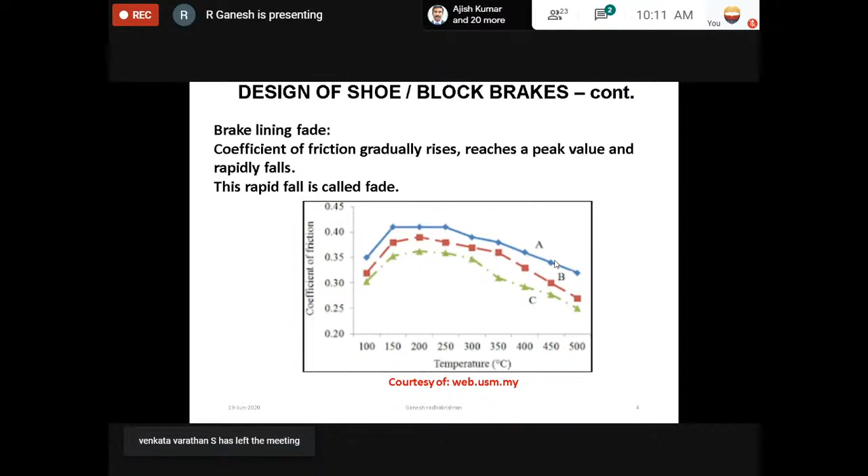Now actually coming to the topics, since the topic given is design of shoe brakes, I will be discussing three types of shoe brakes: single shoe external braking system, double shoe external braking system, and internal shoe expanding braking system. Let me give a small introduction on the single shoe external braking system.

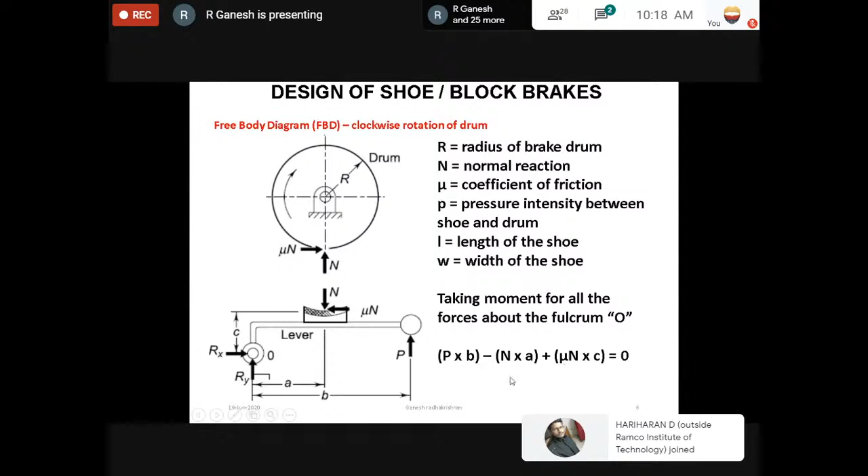If you take N into A on one side, and P into B plus mu N into C on another side, and if you satisfy this condition A greater than mu C, the frictional force helps to reduce the magnitude of actuating force. That means when this condition is satisfied, less actuating force or effort is enough to give the correct amount of braking action. That is called self-energizing braking action, one of the most desirable cases in any braking system, because if the entire braking action is done with less effort, we definitely appreciate that.

Coming to case 2 and case 3: when the condition A equal to mu C is satisfied, or A lesser than mu into C is satisfied, in the second case no actuating force is required for braking action, which is not desirable at all. Because whatever the braking system, whether for an automobile, a machine tool, or any application, control should be in our hands. So if no actuating force is required for braking action, it is not a desirable case. We should not allow it to go to self-locking conditions.

And the third one is uncontrolled braking and grabbing conditions where the actuating force is negative, which again is not a desirable case. So while designing a braking system for any application, while selecting the distances A, B, and C geometrically, and after selecting the correct brake lining materials, you should check whether this condition A greater than mu into C is satisfied or not.

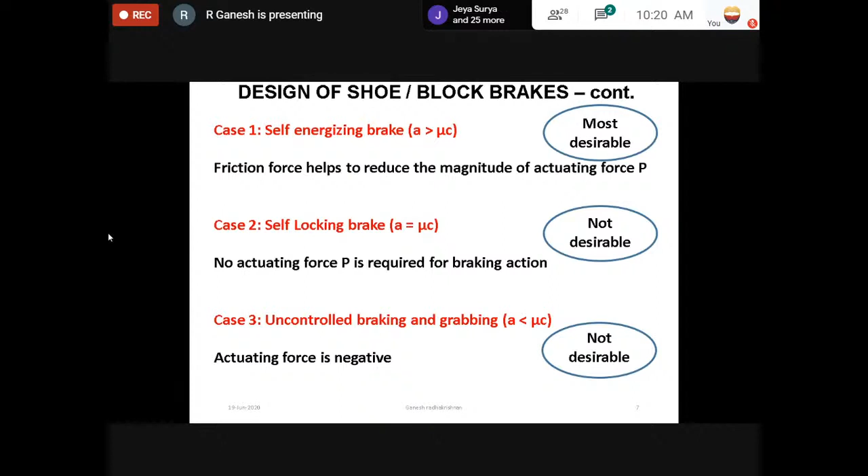Normally in the design, certain things we calculate in any braking system. The first one is the braking torque. Braking torque, of course, we all know it's the frictional force multiplied by the radius of the brake drum.

Frictional force is mu into N. Mu is the coefficient of friction, and N refers to the normal reaction. So frictional force is mu N into capital R.

The second one is the dimensions of the brake shoe. Pressure intensity equal to normal reaction divided by the cross-sectional area. So P equal to N divided by L into W. This L, the length of the shoe, can be calculated by radius of the brake drum multiplied by 2 theta. L equal to R into 2 theta, the included angle of the brake shoe.

The third item is heat generated during braking action. Heat generated equal to frictional force multiplied by the average velocity. Average velocity is the initial velocity plus final velocity divided by 2. Sometimes the final velocity can be either 0 or some velocity, because the braking action can be either to reduce the speed of the system or to stop the system. When it stops the system, the final velocity becomes 0. When it's reducing the speed, you will have some value for the final velocity. So you take average velocity and multiply by the frictional force to get how much heat is generated during braking action.

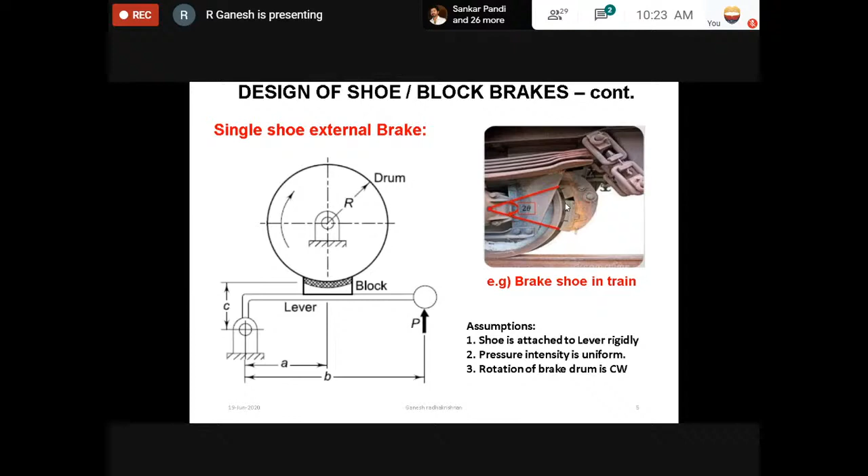Let me explain with this diagram. See here, when this 2 theta goes beyond 45 degrees, we call it a long shoe. About this midpoint, on the upper side as well as lower side, you will have more curvature. This curvature will offer some additional wedge friction, inclined friction, that will slightly increase the coefficient of friction. How much the coefficient of friction is increased can be calculated by this empirical formula: mu dash equal to mu into 4 sine theta divided by 2 theta plus sine 2 theta.

When mu is, for example, 0.2 or 0.3, when you substitute in this formula, you get mu dash, the equivalent coefficient of friction, slightly higher than the original. That means it takes care of all those inclined surfaces on either side of the midpoint, accounting for both tangential forces and normal forces of the friction force, which slightly increases the coefficient of friction. Once you calculate this equivalent coefficient of friction, the earlier condition goes invalid. The pressure is not going to concentrate on the midpoint; it is going to distribute uniformly on the entire surface.

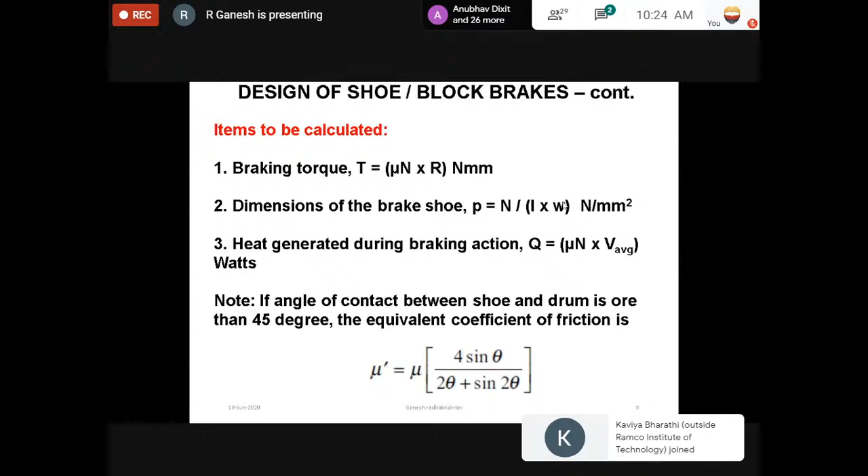Coming for the next shoe, that is a double shoe external braking system. So here you can see the same type of arrangement will be there. This is the lever, this is the brake shoe, and this is the brake drum.

Exactly in case of a single shoe external braking system, you would have seen one half of this. So you will have two halves, one on the left and another on the right. You will have two levers, two brake shoes, one on the left, one on the right. And you'll have two fulcrum points or two pivot ends. And this represents the actuating force or effort we apply for the braking action.

This diagram I have taken from one example problem, that's why it has some dimensions. But you can omit that and see the structure of the braking system alone. And this is a real-time example what I've given here. You can see two external braking shoes on either side in the train.

So in a single shoe external braking system, normally we calculate torque equal to frictional force multiplied by the radius of the brake drum. Here it's a double shoe braking system, so we'll have two reaction forces and two frictional forces, on the left as well as on the right shoe. So here the torque will be the summation of torque on the left and torque on the right, that is frictional force on the left and frictional force on the right.

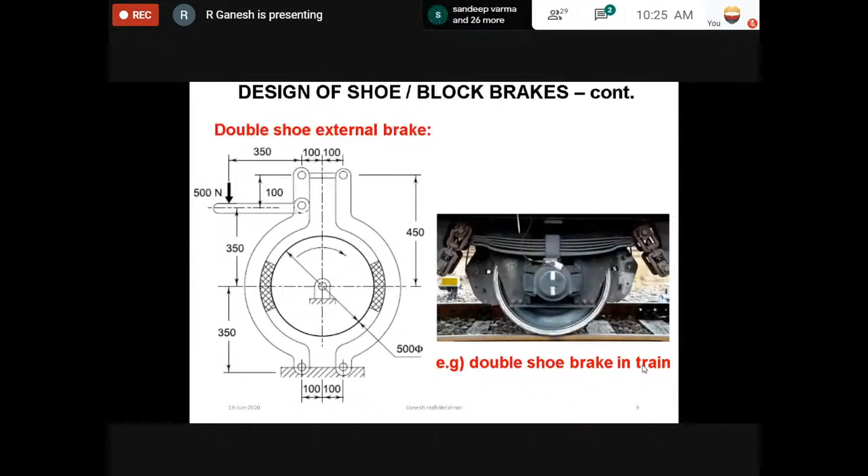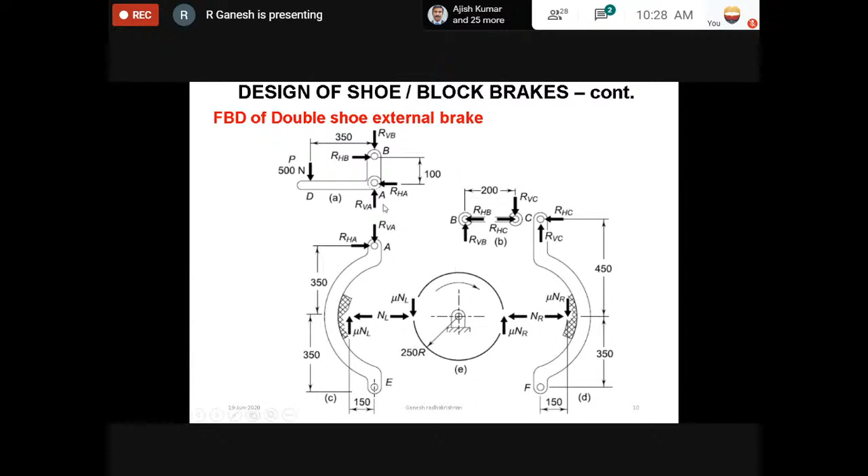That's what I've given here. So using equilibrium of forces and moments, all the reactive forces and normal reactions can be determined. And here the total braking torque is given by T equal to mu into the sum of the two normal reactions, one for left, another for right, multiplied by R.

In case of single shoe external braking system, instead of two normal reactions, you will have only one normal reaction. That's the difference. And dimensions of the shoe, as usual, what we did in single shoe external braking system, the same concept you can apply here. The pressure intensity equals normal reaction divided by the cross-sectional area.

Cross-sectional area is again L into W. L is again R into 2 theta. While taking the normal reaction, here you have to take the maximum normal reaction, whether it is for the left shoe or the right shoe. So once you calculate the dimensions of the shoe based on maximum normal reaction, the design will be safe.

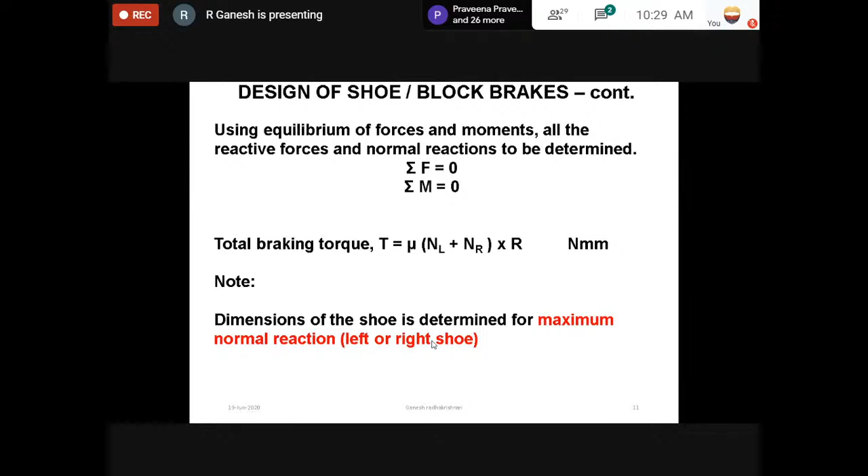During the running condition, when you apply this hydraulic pressure and it goes to the left side shoe and the right side shoe, one thing you should keep in mind: the amount of actuating force applied on the left shoe and right shoe will definitely not be equal. If it's a stationary system, it will definitely be equal.

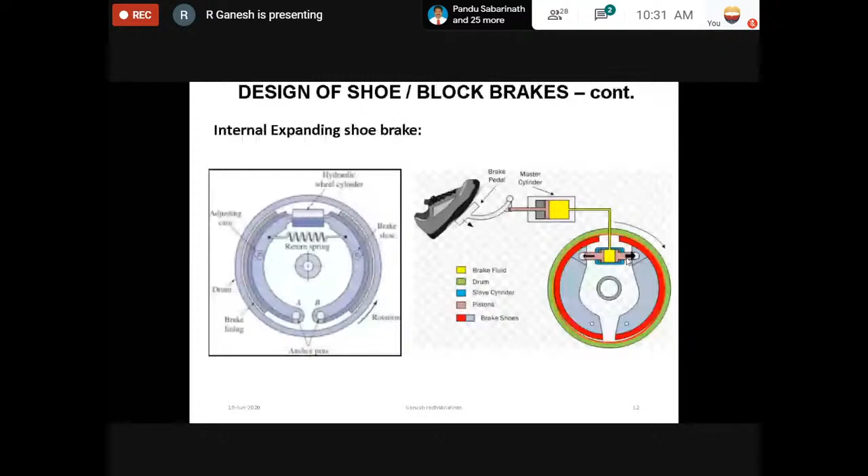Since I'm taking an arbitrarily small point, I represent it by dn. This dn is a normal reaction, and mu dn represents the frictional force. Once a shoe has more than 45 degree included angle, as I told, it's considered a longer shoe, and the pressure intensity is not going to concentrate at the midpoint of the shoe. It's going to spread on the entire brake lining surface.

If you shift this point to the upper or lower side, this phi is going to change. The point is, the intensity is not concentrated on a single point, which is only valid in case of included angle less than 45 degrees. That's the reason why we consider the two components of frictional force and two components of normal reaction about this instantaneous angle phi.

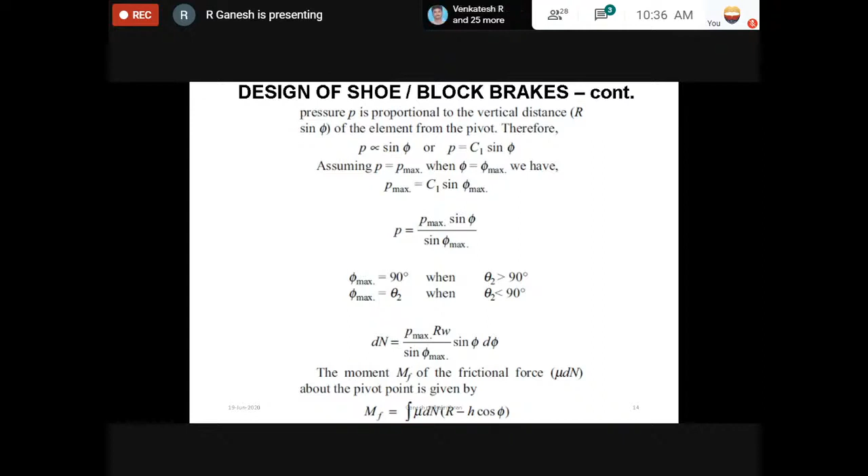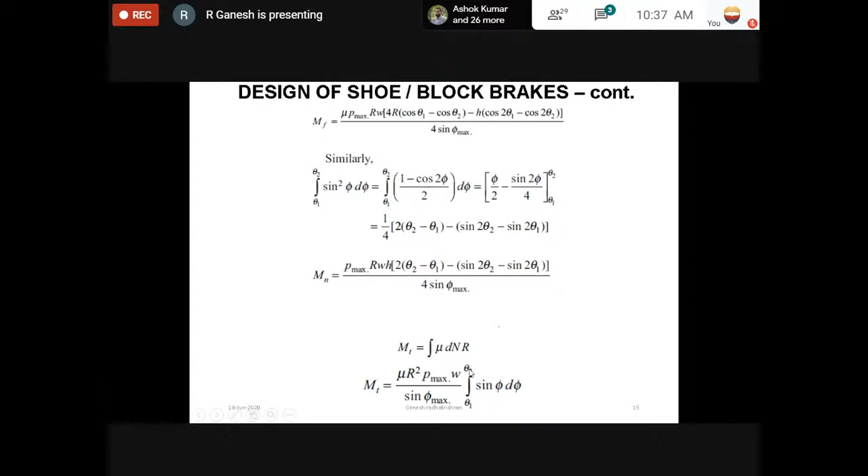So braking torque equals frictional force multiplied by the radius of the brake drum. Since it is a long shoe, we should calculate it from the limits theta 1 to theta 2, that's why I'm integrating it. So integration of frictional force mu into dn is the frictional force, multiplied by r, the radius of the brake drum. So integration of mu dn into r will give you the total amount of braking torque. You can integrate between the limits theta 1 to theta 2 after substituting all these terms for dn. Then if you integrate, you will get the braking torque. So this is the braking torque.

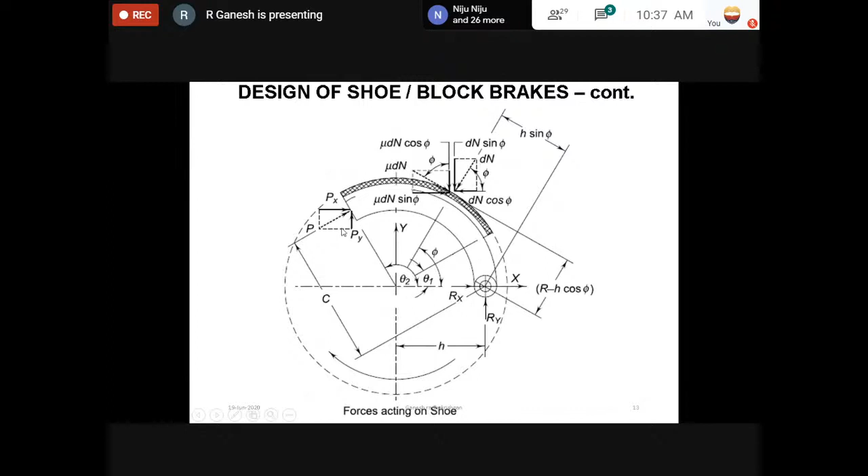Now, coming to the final moment equation. So here we have discussed so far three forces: one is actuating force, another is normal force, another is the frictional force. Since frictional force and normal force are not going to act at a single point, we have separately derived the moments for frictional force and moment for normal force. The actuating force is capital P, so capital P into C. Here you can see the distance C, from the fulcrum point to this actuating force. So P into C is the moment due to actuating force, plus mf is the moment due to frictional force, minus mn is the moment due to normal force.

Since P into C is clockwise, mf is clockwise, I have given positive sign, and mn is anti-clockwise, so to give the difference, I have given the negative sign. So that's equal to 0. Finally, we'll get the equation for actuating force: mn minus mf divided by C.

The same concept applies if the rotation is reversed. The above equation is derived for clockwise rotation of the brake drum. When the direction of rotation gets reversed, the frictional force direction is also going to get reversed. So the equation becomes P equal to mn plus mf divided by C. Here you can see the geometrical conditions remain the same, and other aspects - brake lining, material, coefficient of friction - everything remains the same. Once the direction of rotation gets reversed - let us take clockwise as the forward direction and anti-clockwise as the reverse direction - if you see the actuating force, it is slightly increased in case of reversed rotation.

So braking action when traveling in reverse is not as effective as traveling in forward. The reason behind this is we need more amount of actuating force or effort to apply for the braking action. So there comes the discomfort, and that's the reason why it is not as effective or as comfortable when you go in reverse direction. So this is the reason for that.

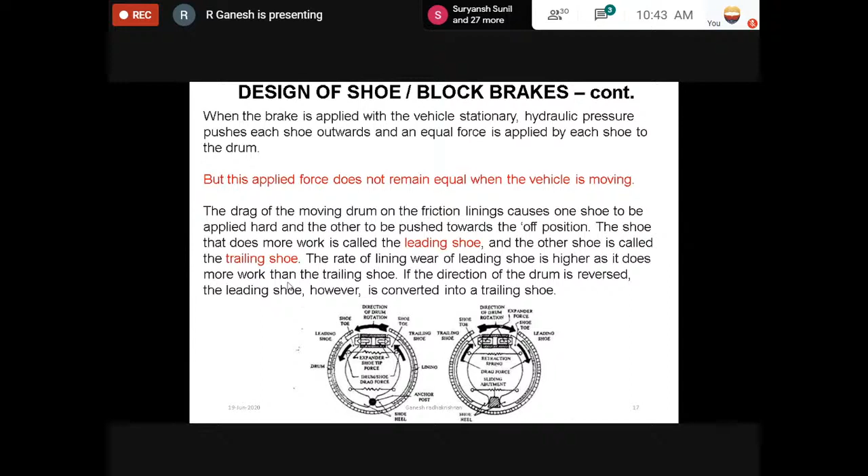Let me go for an example for each. I think you've already solved all these problems in your classrooms. I'll just give a brief idea.

This is an example for a single shoe brake system. The block brake as shown in the figure provides a braking torque of 360 Newton meters. The diameter of the brake drum is given as 300 mm, coefficient of friction is 0.3. They're asking to calculate the actuating force to be applied at the end of the lever for clockwise and counterclockwise rotation, and second, the location of the pivot or fulcrum point to make the brake self-locking for clockwise rotation of the brake drum.

Now the braking torque is given in the problem itself as 360 Newton meters. So braking torque, we know the formula: frictional force multiplied by the radius of the brake drum. T equals mu N into capital R. T is 360 Newton meters, mu is 0.3 given in the problem, capital N into 0.15, substituting the radius of the brake drum in meters since the left hand side is in Newton meters. So the normal reaction we get is 8000 Newton.

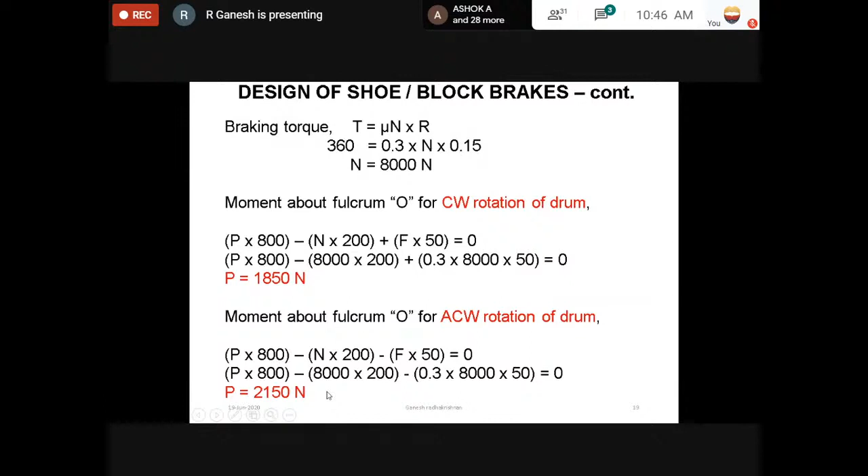The second question in the problem is to find the location of pivot or fulcrum for the brake to be self-locking. For self-locking condition, we already discussed three important cases: self-energizing, self-locking, and uncontrolled braking. For self-locking condition, the condition is A equal to mu into C.

In other words, there is no actuating force. Without actuating force, the braking action will be done. That's why we told it's not a desirable condition.

So when the actuating force is 0, P equal to 0, you substitute in this equation for the clockwise condition, and if you calculate, you will get A equal to 667 mm.

That means in this diagram for the clockwise rotation condition, instead of this distance 50 mm, if you apply 667 mm, that means this O goes more down. So there the self-locking condition attains, because the brake shoe is going to rest on the brake drum rigidly, where it applies on its own and attains the self-locking condition.

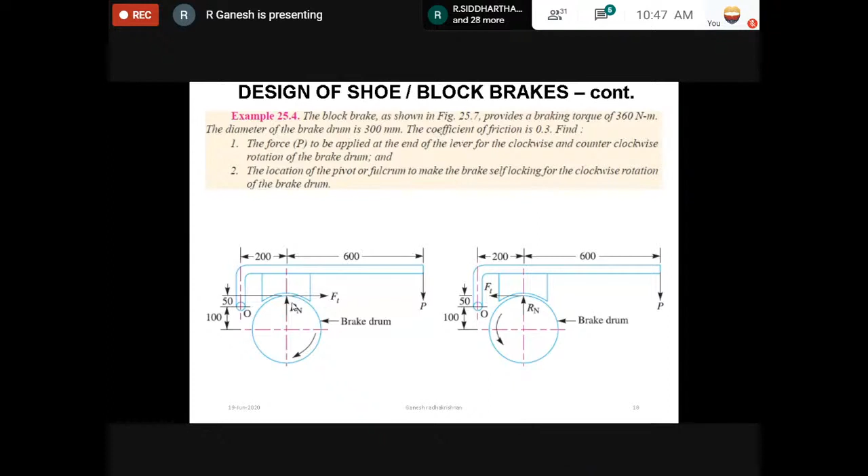There is no need for any external force. This is only a hypothetical condition. In real-time applications, we will not allow for self-locking. So the distance A equal to 667 mm.

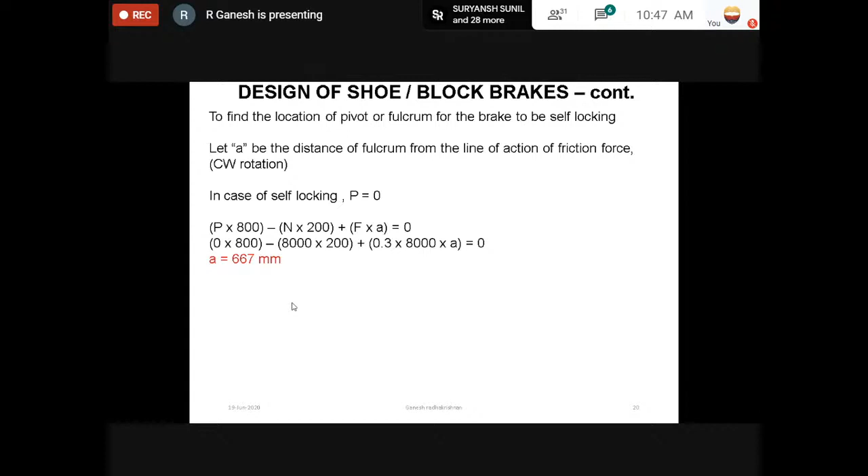Coming to the second example, this is for a double shoe external braking system. The double shoe block brake is shown in the figure. The brake drum rotates in clockwise direction and actuating force is 500 Newton, which is given here. This is the actuating force. Coefficient of friction is 0.35. Calculate the torque absorbing capacity.

So in this diagram, this is the left side brake shoe, this is the right side brake shoe. The diameter of the brake drum is given as 500 mm, so radius of the brake drum is 250 mm. All the dimensions were given.

So here you split it. This L-shaped lever is one lever. Here you have one horizontal lever, and this left side lever and this right side lever. So totally you have 4 levers in this arrangement.

For these 4 levers, you have to draw the free body diagram and indicate the forces acting at each and every pivot point and the external point, and the normal reactions, frictional force, everything. Then if you apply the equilibrium conditions, you will get the values.

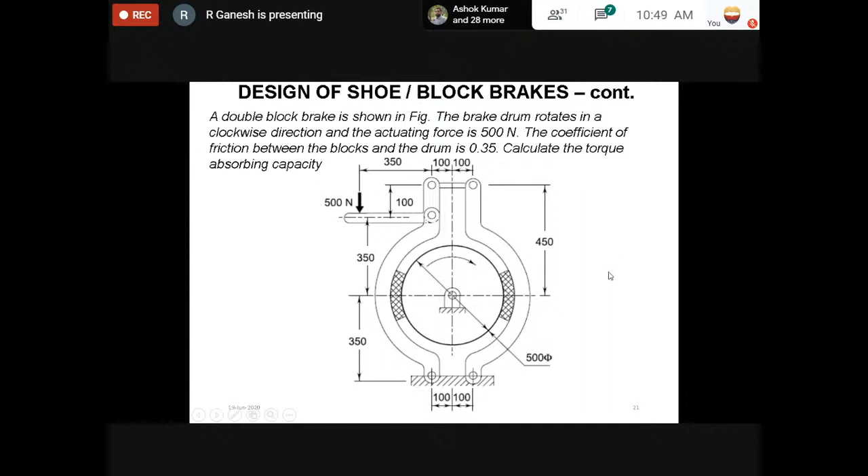So you can see the free body diagram here. This is the first L link, DAB. This is the horizontal link, B to C. This is the left side lever, AE. This is the right side lever, CF.

As we already discussed in the introduction about the double shoe braking system, I told all these things. So these are the different reactions: two horizontal and vertical reactions for each and every pivot point. And in the brake shoe, you will have a normal reaction and one frictional force. Once you integrate all these forces, now you can apply the equilibrium conditions.

Let us take first the link DAB. If you take this link DAB, RHB into 100 equal to 500 into 350. This is RHB, RHB into 100, and this is a clockwise moment, that is equal to 500 into 350, where 500 is the external force and 350 is the distance. Here they are taking moment about this fulcrum point A.

With respect to point A, RVA and RHA are not going to contribute any moment, so you can forget about these two forces. The remaining forces are RVB, RHB and 500. Out of these three forces, RVB is not going to create any moment because its line of action passes through point A. So if you leave this also, at last you will have only these two.

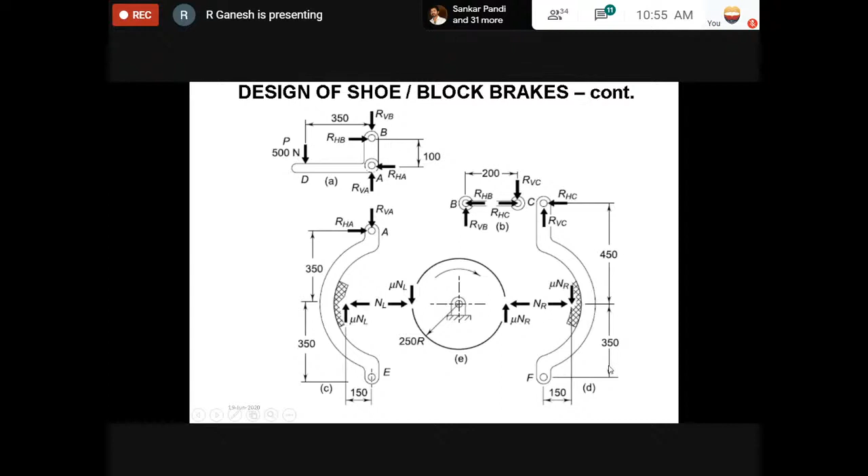Then mu NR into 150, then NR into 350. When you substitute everything in this equation, since you already know the value of RHC, you substitute and get the value of NR. That's all. Again, this positive sign and negative sign is not an issue at all. Once you keep clockwise as positive, you keep anti-clockwise as negative, or vice versa. There is no rule for that.

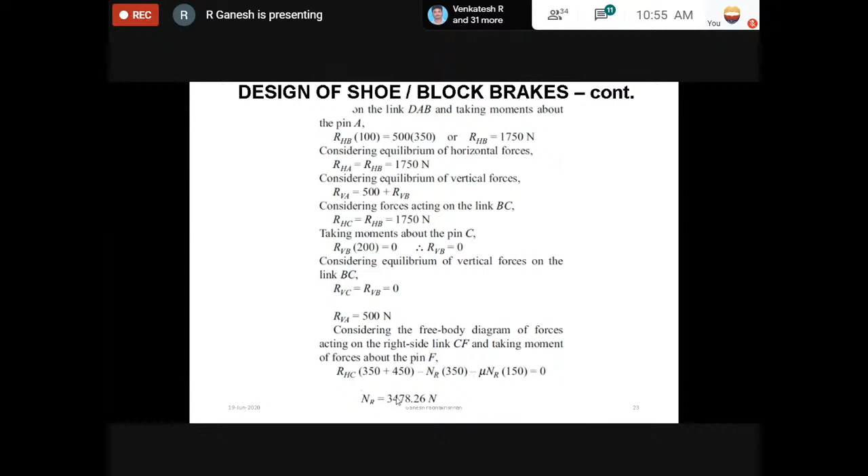Similarly, you take the moments for the left side pin AE, you will get the answer for NL. And total torque absorbing capacity is MT equal to mu times NR plus NL into R. In case of single shoe braking system, you will have only one normal reaction, so you get mu N into R. Since there are 2 shoes here, you have to sum the normal reactions of both the right side shoe and the left side shoe.

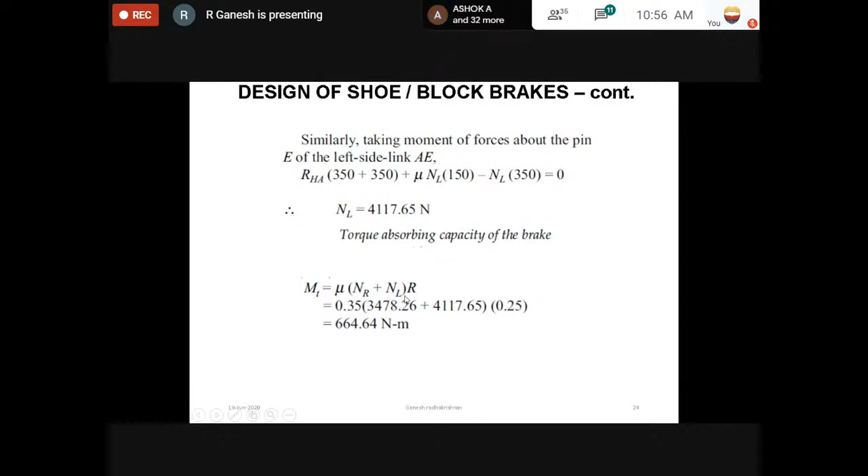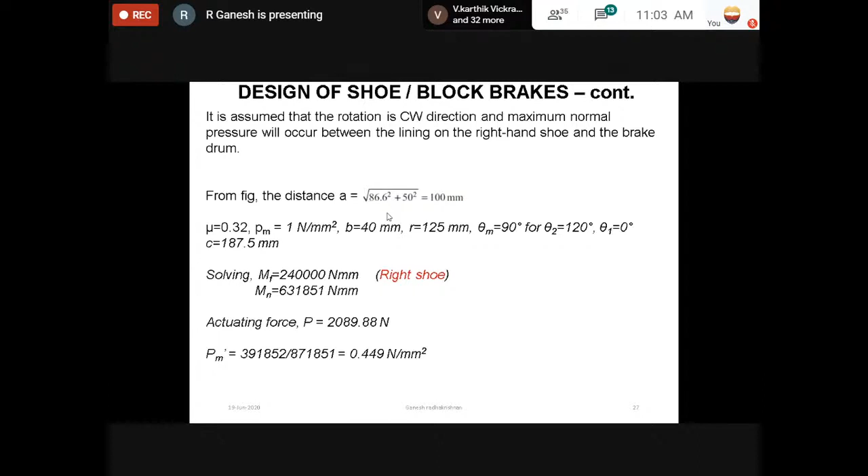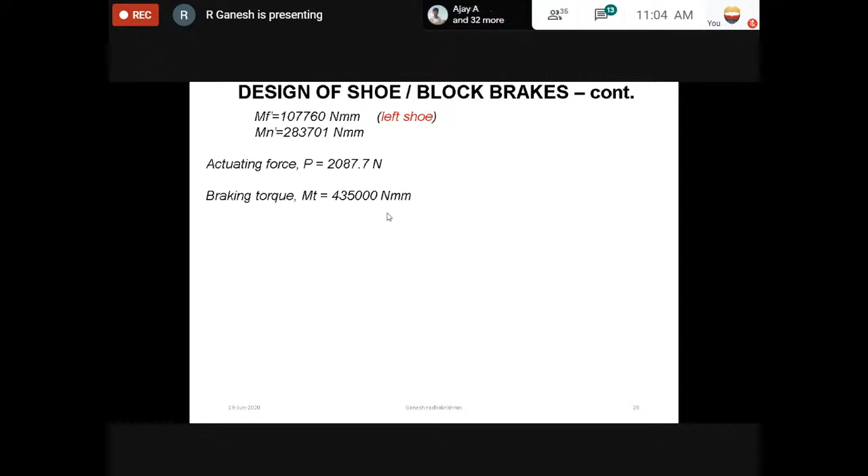I think I've given just an overview of the shoe brake systems: single shoe external, double shoe external, and double shoe internal expanding. I don't know whether I rushed or went fastly or slowly. To my knowledge, I have given just an overview. I think you would have got some idea. If you have any doubts, you can clarify. So thank you, sir. If any doubt, participants having any doubt, please ask, sir.

Sir, I'm Gururaj, sir, coordinator of this program. Yes, sir. Tell me, sir. Sir, during the reverse action of the automobile vehicle, why the braking effort is not effective, sir? So, what's the exact answer for this question, sir?

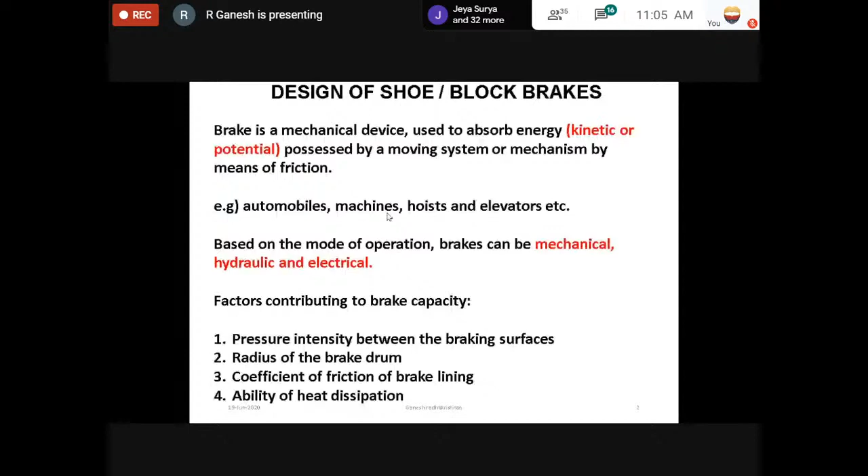We will have a little discomfort during the reverse action because we need to theoretically apply more amount of actuating force. So if you see the relation for forward clockwise rotation, P is equal to Mn minus Mf divided by C. It's a difference. Same thing when you apply for the reverse direction, it becomes an addition. So slightly you need to apply more effort. That more effort only we call it as not so effective. Anyway, action is going to take place.

Okay. Thank you, sir. Thank you. So, any other questions, sir, from participant side? Yes, sir. In the design point of view, sir, good morning, sir. The presentation is excellent. Thank you, sir. I have only one doubt.

In the design point of view, what is the reason or what is the cause for squeak noise? In the rainy time, the squeak like that, the noise is coming in rainy times, sir, mostly in two-wheelers. Do you have any idea about this?

So actually the noise is due to sometimes the sliding action which takes place in the contact between the shoe and the brake drum. Normally you will have a slippery action in the rainy times. That slippery action will create that noise because the amount of gripness between the contact surfaces will not be that much rigid during any wet conditions. So that leads to a light amount of slippery action. That slippery action will create a noise.